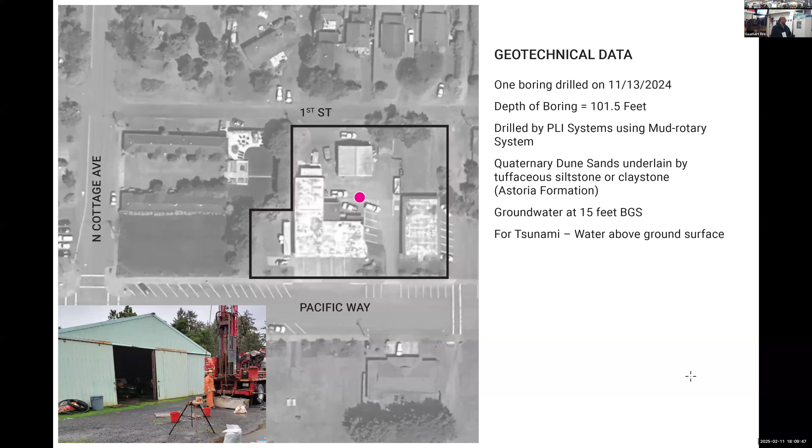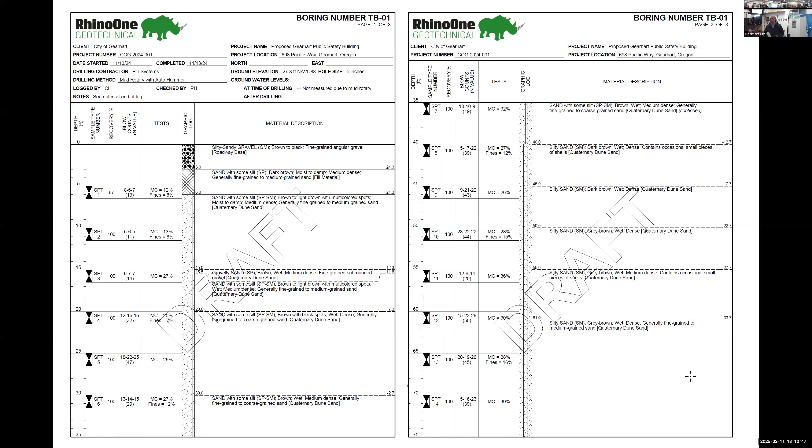One interesting thing about this site is that we have soft deposits and hard deposits, so it's not a uniform soil condition with just soft soils or just hard soils. This basically extends down to about 60 plus-minus feet, and then we get into some better material. Next one.

So our task here was, this particular structure would be designed with the Oregon Structural Specialty Code 2022. It might be the next version by the time we get through the design process, so the code might change. The ASCE 7-16 or 7-22 are the codes used by the Oregon Structural Specialty Code, and they refer back to that for the seismic design criteria.

I understand that it's a tsunami risk category 4 structure. So we looked at all the recent data on the site, we looked through all the USGS data. Based on that, we figured out that the design earthquake on this site is about a magnitude 9 with a peak ground acceleration of 1.13 G. Anything above 0.5 G is a pretty high acceleration for buildings to sustain.

So we did what is called the liquefaction analysis. Basically, what that means is if you've got sand on the beach, if you see the water rises, the sand loses strength. So that's what we see here, that as the water comes up and there is shaking, there will be excess water pressure and the sand will basically lose strength. When it loses strength, we think the settlement would be on the order of 4 inches. It could be as much as 10 inches. Now, the thing about these numbers is they are orders of magnitude. The science isn't there where you can say this will be 2 inches or this will be 20 inches, so these are all order of magnitude numbers that we look at.

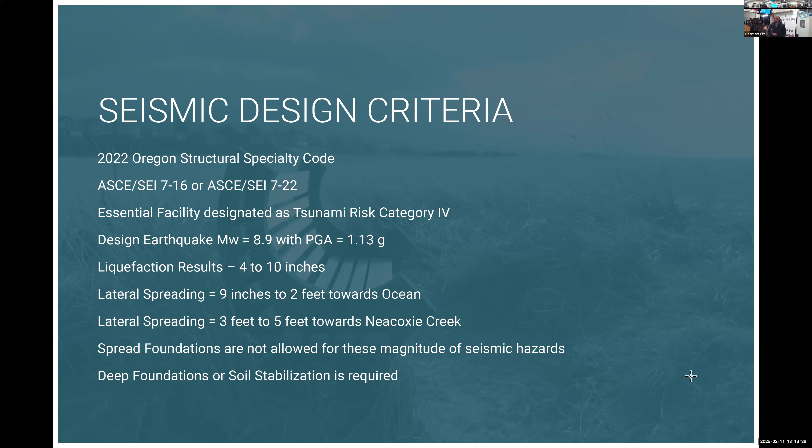So we did look at deep foundations. The concern with deep foundations is for buildings like this, for bridges we'd have no concern, we'd go with a big 10, 12-foot drilled shaft and build a massive structure to support a bridge. But for buildings, the amount of foundation needed makes it cost prohibitive, and it becomes uneconomical to do deep foundations for these magnitudes.

So what we think is a better option here is to do ground stabilization, which is basically we take a big auger, we drill down, and then we inject cement into the ground and mix the soil in situ. So basically we're mixing the soil and making it a better product as we bring the auger back up. It is more economical than a deep foundation, but it's not a very cheap system either.

So this is just a typical layout, based on the work that we did in Manzanita for their city hall. We built a similar system out there. The soil conditions there are not as bad as over here, because here we plan to go down to about 60, 65 feet, whereas over there we were about 45 feet. And the area here is probably a lot larger than what we did in Manzanita.

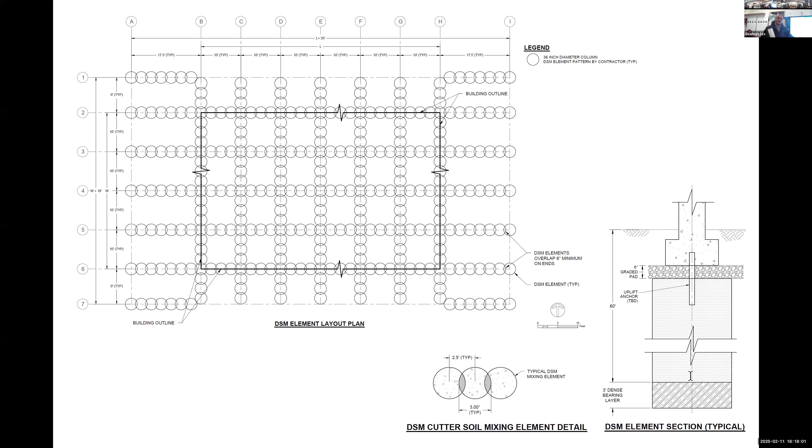So just to be clear, whether there's a high chance or low chance, it doesn't matter because the code says that if there's any chance, you have to design to this standard. That's the standard we have to hold it to. Is that per state of Oregon, the United States government, the county, or who? So there's the International Building Code, which is used in all jurisdictions in the US. And then Oregon has their own code, the Oregon Structural Specialty Code, which refers back to the IBC, and that refers back to the ASCE, the American Society of Civil Engineers. So the governing code is the Oregon Structural Specialty Code, but it refers back to the IBC.

Question, Rajiv - you said deep foundation would be less economical compared to the soil mixing or soil amendments we could do. Would deep foundations include things like rammed aggregate piers? No, we can't build rammed aggregate piers deep enough, plus there's another concern here.

Now the second scenario is when the tsunami comes - you've got material on top basically swirling around, so you don't really have any support there. Basically you have the building, the deep foundation, the slab, and all this soil has now turned into liquid. That's the second condition you'd be designing for. And for building structures, in my experience, it has never turned economical to use deep foundations under these conditions.

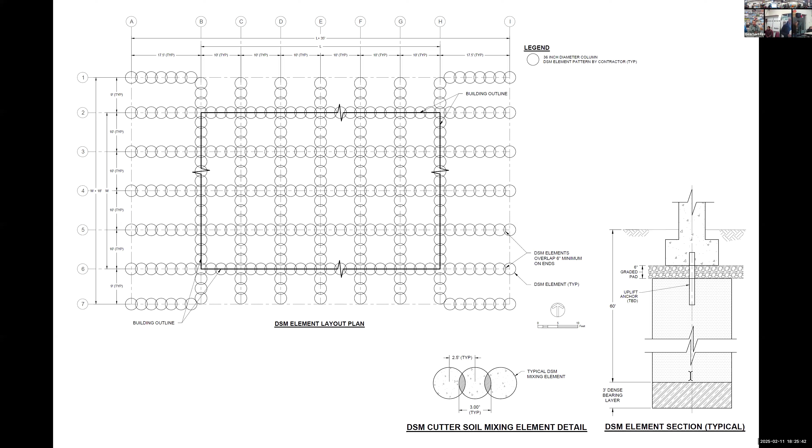I think, Phil, if you want to talk about the site. Now that we know we have great soils, I wanted to do a little prep for the first activity where we start looking at design options. I wanted to remind people of some parameters we understood from the last community session — the setback lines. We looked at the Pacific Power and Light site and identified the setback lines, but we also identified an easement, which reduces the amount of usable square footage on that site.

Also, the ridge path is a space we can't develop, so we can't really unite the two together. We have some light dashed lines showing an offset of about 10 feet from the existing buildings, which we're trying to make sure we don't impede with this new development — either for fire code setbacks from the existing city hall, or for construction space for the building to be built before the fire station is demolished.

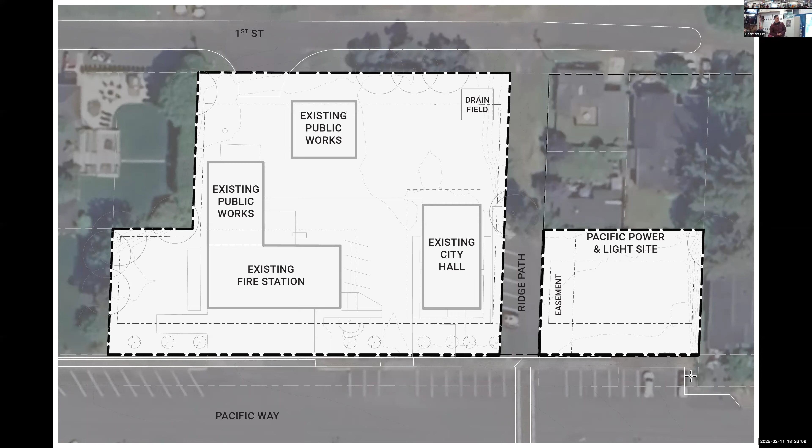I'll give a quick summary of the community process. We had a productive initial work session in December where we listened to the community's goals and priorities for the project. Then in January we presented the draft building program and got feedback and comments on it, and we also had the structural engineer talk about the challenges with the existing structure and how we're thinking about the structure for the new building.

Then there was a fun workshop where we had blocks and got to move them around on the site, talking about development options — the different scenarios and phasing options for development. And then we did the ranking of the priorities.

So everything we heard from the first community meeting, we then got a chance to prioritize and listen to those. And then there was an exercise where we got to rank those. So Phil has a summary of those rankings today.

We had 52 participants in the first meeting, and then 79 people participated, both in person and online. So a lot of good feedback so far on the process.

What Phil's gonna do, as I mentioned in the agenda, is run through the development options. We're gonna basically break out into small groups, talk about the options, have a summary, and then a chance for everyone to give feedback and vote on the options today. That will inform our process, because our goal is to go from the 5 options Phil's gonna walk us through today, down to 2.

That we're gonna take to city council, I think it's March 5th, right, Shannon? So the idea is that the community is gonna recommend the top 2. And then those top 2 are gonna get approved by council and move forward into design development, where we're going to work through floor plans, site plans, exterior and interior renderings of those 2 options, and do a detailed cost estimate. And then that will come back for review and community recommendation in May. So that's our current timeline.

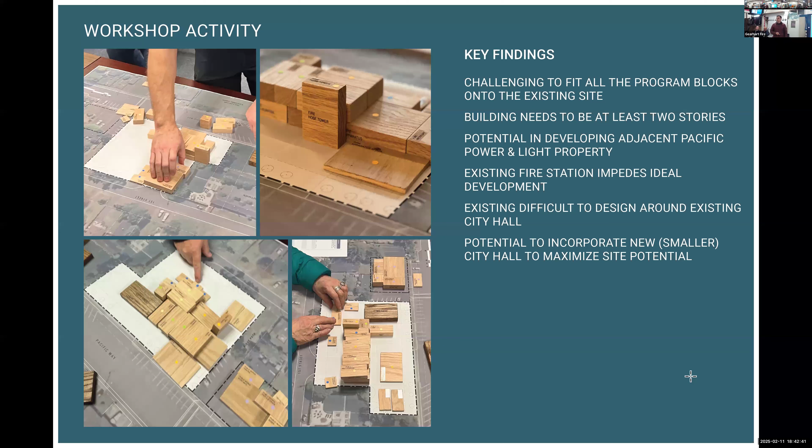And then lastly, there was some potential in incorporating the city hall functions in, which would be a smaller footprint than the current city hall into the development. So we took all those findings and developed all of them. All the ideas we're presenting are essentially generated in community meeting number 2, and we just merged some similar ones. So before jumping into that, were there any questions about making sure we captured everything?

All right, so this is going to be a series of slides walking you through 5 scenarios, broken down step by step. It's going to be a lot of information. We'll revisit the options after we talk about the priorities. But I want to go through each scenario slowly, and if there are questions, feel free to raise your hand, because the main goal is to make sure there's clarity—that everyone leaves this portion with clarity so we can make informed decisions later on.

I have a question—do you know the square footage the Seaside Fire Department in City Hall uses? I do not. Is anybody familiar with that? That's almost a whole city block. City Hall fire station—are you saying it takes up a whole city block? Pretty much, yeah, I think they have 8 fire truck bays.

Here we're sitting at 4 bays—they have pull-throughs so it's double, so that's 8 fire truck bays where we have 4. They put living quarters on top for their volunteers and interns, doubling their living quarters, down there. I can get you an estimate of square footage based on that. And what did they pay for their recent structural additions to the fire station? Over 3 million just to remodel that.

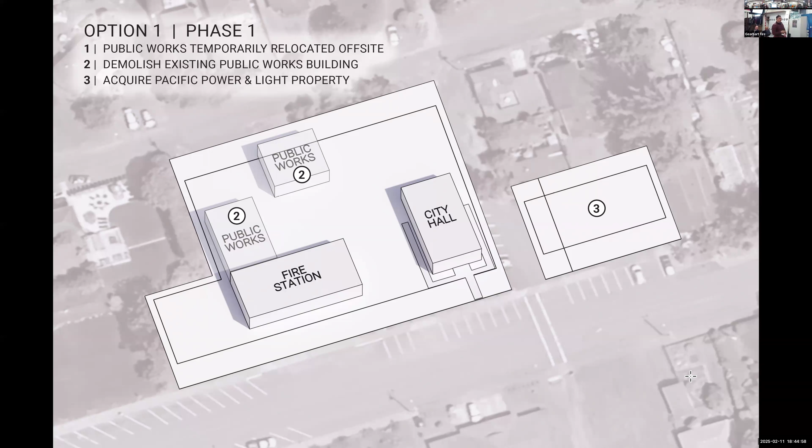All right, okay, so option 1—we're going to break it down by steps. Public Works would be temporarily relocated off-site, and then we would demolish the 2 Public Works buildings. Then it would be in the process of acquiring the Pacific Power and Light property. Once that's done, we would build a singular building that incorporates public safety, PD, fire department, and Public Works as well. We would still have the existing fire station serving as that apparatus protection.

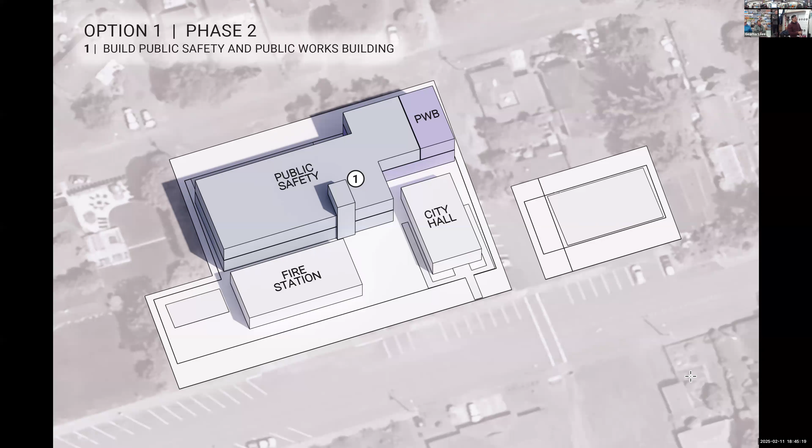And then we would demolish the existing fire station and build that apparatus apron. Over on the right side, in the Pacific Power and Light site, that would be the location for parking stalls and Public Works storage. This scenario doesn't have a lot of available real estate beyond what's shown on the existing site, which is why it really needs the Pacific Power site for vehicles or some of that Public Works storage.

Okay, on all of these, have you looked at your septic capacity? Has that been analyzed? It's been analyzed to the point that we understand the footprint that would be required. In this scenario, that's something that's kind of complicated—here in the southwest corner is where we'd be locating a new drain field, replacing the existing drain field. So there'd definitely be some complications with that.

In this scenario, it looks like the Public Works building is off in the corner, but if I remember from those diagrams, there was sort of the apparatus—there's like the fire. Right, so what you're seeing here is a 2-story space. It's labeled more diagrammatically because it's concealed with space above it, but the apparatus would open up onto First Street on the north side, versus over on Pacific Way. And by 2-story, you mean the height of 2-story, but it's really just a loft for storage—it wouldn't be an occupied second story. Makes sense.

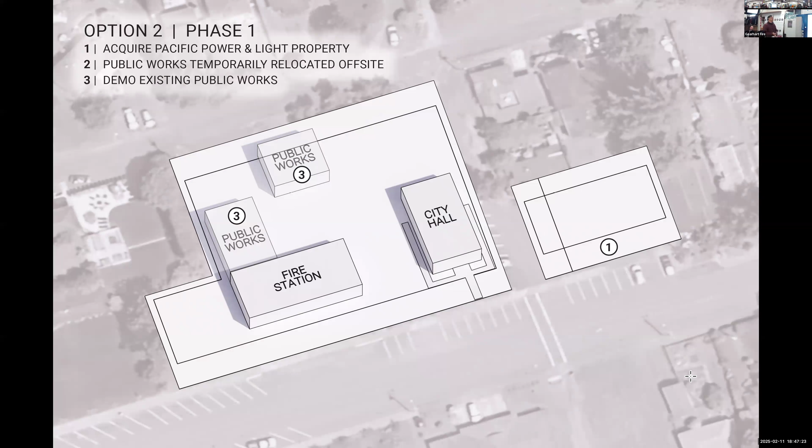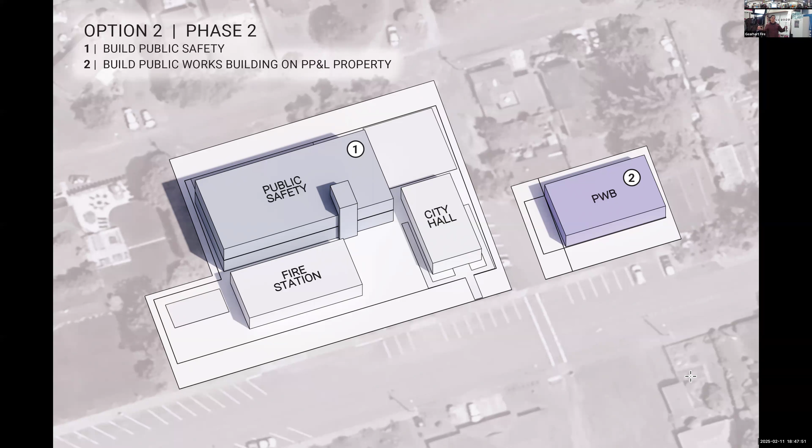All right, so on to option 2. In this scenario, we'd be acquiring the adjacent site, temporarily relocating Public Works, and then demoing that, and building a 2-building option. The public safety building would be separate, but it gives more space over into the northeast corner for a lot of that uglier storage-type space that Public Works would have. The Public Works building would essentially take the entire buildable footprint. And then we would demolish the existing fire station and build the apparatus apron.

So you can see there's now more developable yard in the northeast corner. It would still have access to the fire apparatus bays on Pacific Way, but now Public Works would also have apparatus bay access off Pacific Way.

To a savings, would the Public Works building need pilings underneath it? I think we would not have to build to a essential facility standard. Right, so we'd have to look at the actual foundations. They probably would not need as deep of footings or piling, possibly, so there's a savings there.

Jack, have you had conversations about doing a quick fundraising effort for the $200,000, so it's not an issue about the land for Public Works for the city?

Yeah, I know you've been wonderful.

We have, and actually a couple of the councilors, including Paulina, have been thinking a lot about that, and talking to some of the people out there, so we'll definitely be on top of it once we have a good plan.

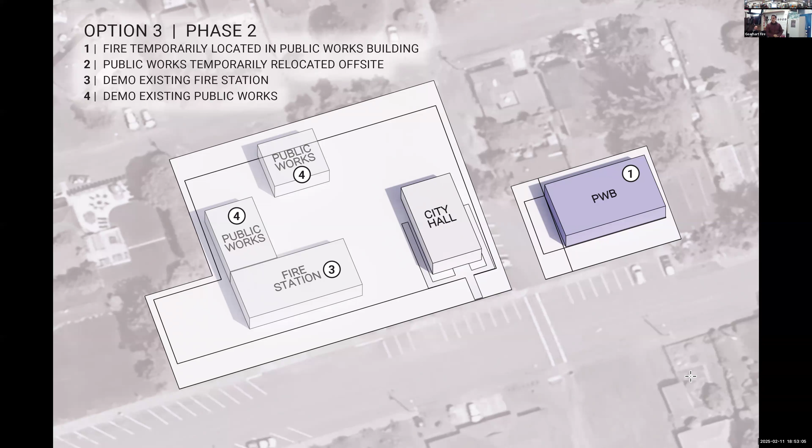All right, so option 3 would be acquiring the Pacific Power and Light site. The first move would be to build the Public Works building on that site, then temporarily house the fire apparatus enclosed and protected. That would give the opportunity to demolish the fire station and the old Public Works building, and develop that site more freely. This is just one scenario for locating fire apparatus where it really needs to be, along with all the site amenities.

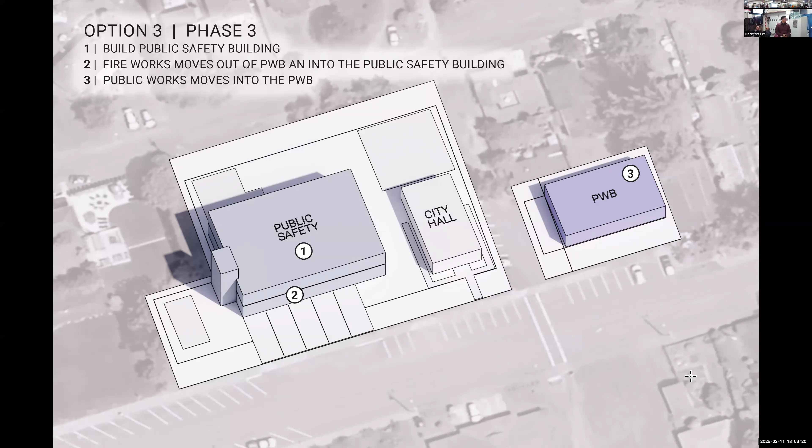And so you can see there's a lot more essentially usable space around it, being able to pull that apparatus bay closer to Pacific Way.

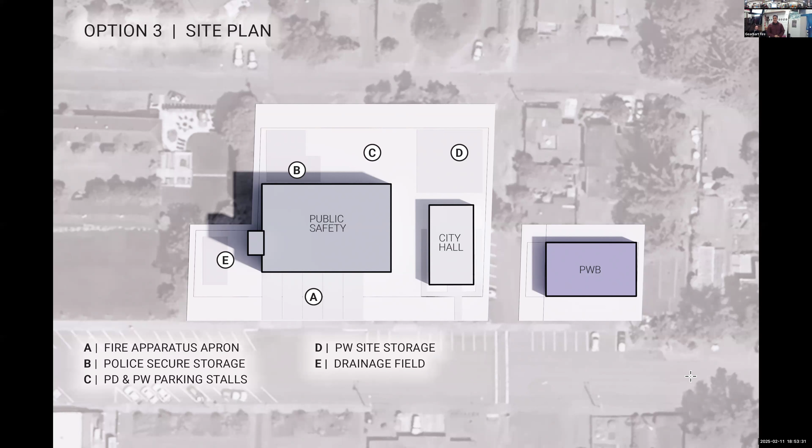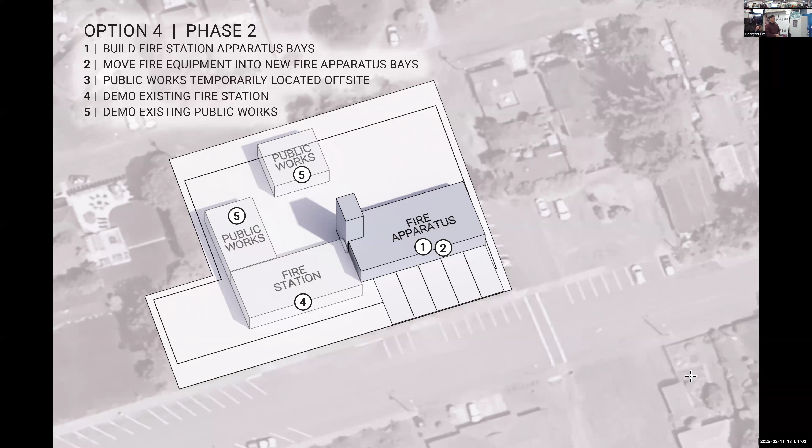So option 4, the next two are going to be going off of that last finding of what potential you had if you took City Hall out initially. So we'd be relocating staff, demolishing City Hall, and in this scenario building a new fire apparatus bay, relocating public works off-site, and demolishing the 3 buildings for public safety and public works, with a smaller footprint for City Hall, about 1,500 square feet.

Again, this is just a scenario, not a developed solution, but in this scenario the fire apparatus bay would have to be on the eastern side of the site. This does not require the Lincoln Power Light property for it to work and get all the outdoor amenities located on site.

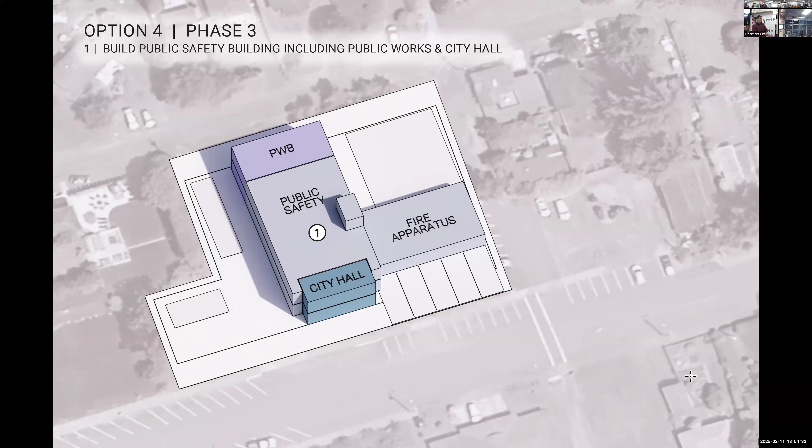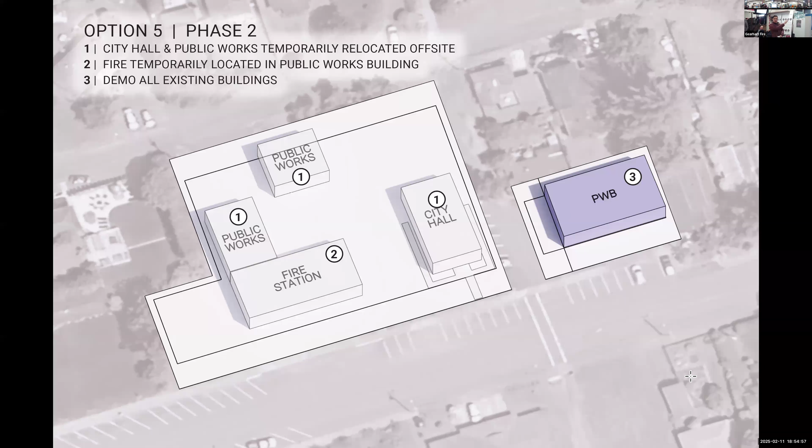So then in this scenario, similarly, we'd be building public works as phase 1. Once you put fire apparatus in public works temporarily, you demolish the entire site, and you have absolute freedom to come up with the most ideal configuration once that's all done. Then you bring the fire apparatus building and public works back in.

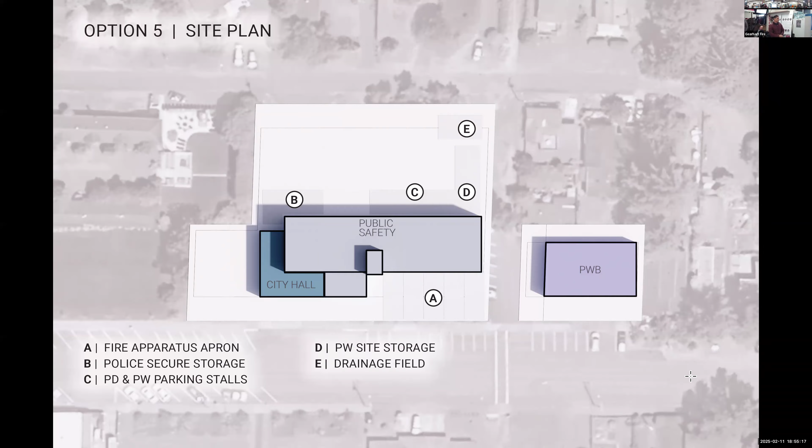And I think that summarizes the 5 options that we are considering. Before we get to the next phase, I want to walk you through the priorities next, reiterate the architectural value of those priorities overlaid onto these options, and then revisit a summary of each of the 5 options. So we'll have another chance to engage and ask questions about the differences between the options.

But before I get to the priorities, is there anything anybody wants to ask? Do you have an approximate cost on each of these options? I know it's a rough cost, but do you have anything that would tell us, you know, that one's gonna cost way more than this one? No, we can talk about relative costs from one to another, but not specific costs.

That'll be covered in the summary slide, with the cost considerations and, like Ian said, the relative costs between the options for all 5 options.

Just before we move on, for those of you who participated in the workshop last week, do these feel like the options you looked at and talked about? Different configurations? Yeah. And I think we have to remember too that those of us who participated in number 2 have been talking to people about them. So I feel like, while we're not the whole community, we're reaching out to the community. And remember, everybody is invited to be here.

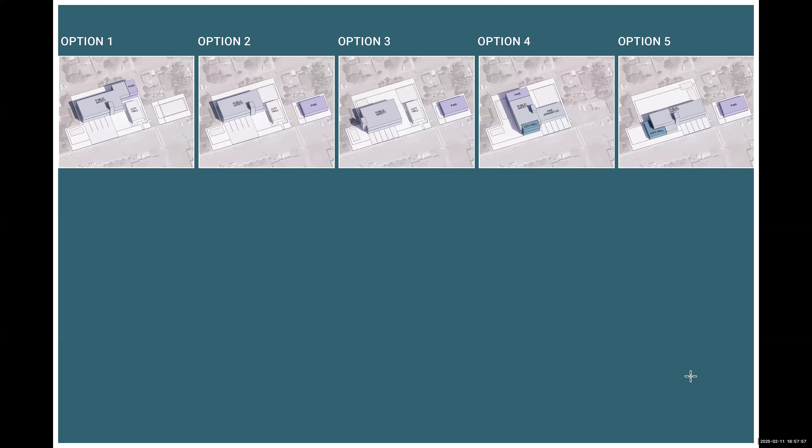So in looking at the different options, it looks like some of the access for the services are from Pacific and some are on First Street. Is there any issue with that in terms of the public works on option 4? Would they come and go from First Street rather than Pacific Way? Is that correct? Yeah, that's correct. So Public Works being on the north side of the site would have access off First Street.

So Public Works didn't have any challenges with vehicles coming in and out of that, but we did, when we looked at it being used as interim storage for the fire apparatuses, it would not work because of the apron and the turning radiuses for the apparatuses themselves. So that's why you don't see that as an option, something we explored, but we realized operationally that was not gonna work. Thank you.

Is it problematic at all for the residents on First Street, that Public Works coming and going from there? They already are.

There potentially is an issue with the only in-and-out for Public Works going back in that direction - there would be more traffic. They're using it currently, maybe not to that degree, but it would increase. There could be a benefit because the grade is lower there too. The grade is a problem back there because of the hill, and where the fire trucks' rear bumpers don't quite clear. For Public Works we could drop the whole thing down, but there's some flooding concern, and we also want to keep elevation for our Public Works folks since that's where repair equipment comes in to help us get back into shape after we've been knocked out of shape.

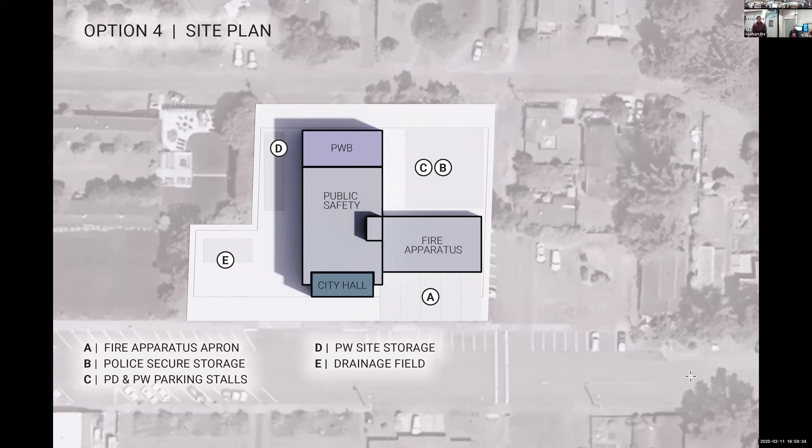There was a question about the water plant. I was wondering about the second story of the plant - is there space up there, is there equipment in there? It appears to be a second story. Yeah, it appears that way, but it's not - it's a high ceiling to fit the equipment that's running for us, and so we can get little cranes in there to lift the equipment out. There's nothing up there, that window is a window to nowhere. So there's no way for us to utilize that for the city? No, we're using it now for some equipment.

What about when Seaside did their bump-up for their residences, expanded residence? They took the top of that building and bumped it out on the side. I'm sure there's a possibility to put a third floor onto that building. Essentially there's almost two floors in there now, but I'm not sure it's built with that in mind. It's a very robust building though, that's for sure.

I guess my first thought would be parking being an issue down there, depending on who went there. If the police department sent vehicles down there, they'd still have to have one car, and remember they have to bring in suspects in a secure environment. Also, when you have a police station, you need some way for the public to interact with police, so we'd have to divide that up - we could require another staff member to interface with the public, at least during some hours, rather than using existing staff to serve both functions.

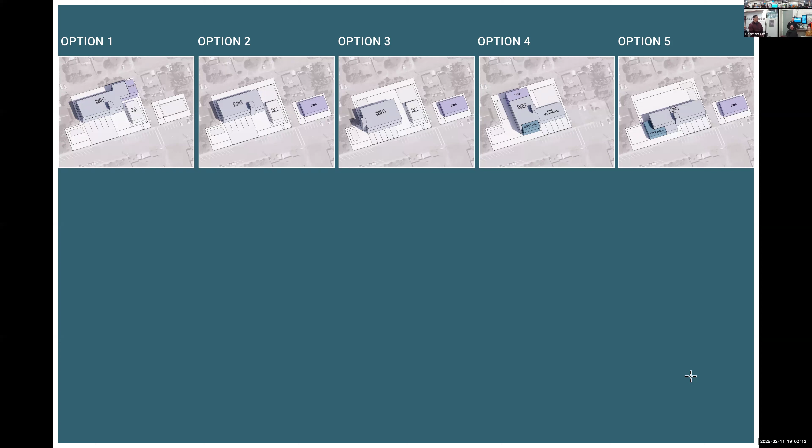So like we mentioned earlier, this is a buildup of our community session one, where we did the feedback and the dot exercise around the priorities. The findings from the survey were mostly in alignment with how we initially ranked it - functional and practical essentially slotted first and second, and safe/secure and resilience also flipped, but the rest of the priorities remained the same.

We took your priorities and have a slide for each describing what it is. For functional operations, we want to make sure this building supports the specific needs of the PD and fire department, looking at factors like accommodating all program spaces, maintaining ideal adjacencies between departments, and providing shared spaces to collaborate. Some factors, like shared spaces, are essentially non-differentiators between the different options - we'll filter through those, but once we choose the two options we'll apply these values to make sure they're still achieved.

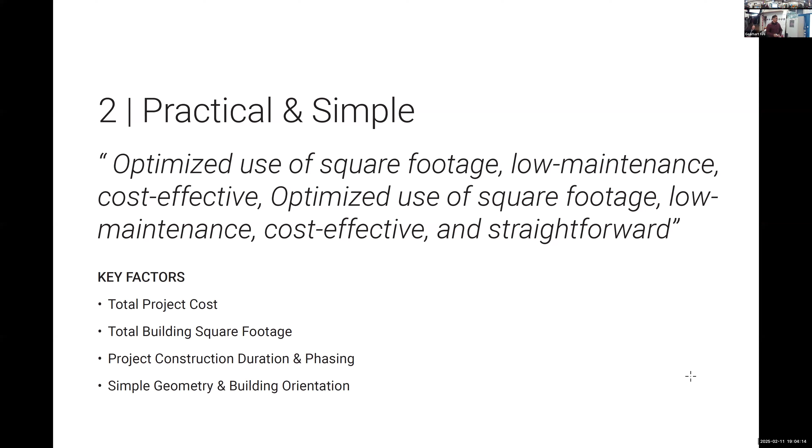But for this phase, it's really just looking at the site, location, and development options. Second, being practical and simple - thinking about optimizing square footage, making sure the building's low maintenance and cost effective. Total project cost is the most important thing, but things that feed into that are total square footage, construction duration and phasing. We talked about foundations, the footprint of the building itself, simple geometry and building orientation, maybe maximizing passive ways to heat and cool the building to save money.

Safety and security - providing a workspace that prioritizes security for everyone who works there and any visitors. This means controlled access to sensitive areas, safe ingress and egress for emergency vehicles, and just a safe environment overall.

Resilience, so we're making sure that the operations of the facility are still functioning after a seismic event or tsunami event, and as mentioned before, the evacuation tower is also something that this building could provide. So community resilience.

The departments being able to be responsive and available, so access to arterial roads. In all scenarios, the apparatuses are going to be directly connected to Pacific Way, so that's not a differentiator. Response time is not a differentiator, and the protection criteria is essentially the same.

But we're gonna want to make sure that as we develop it, that we're thinking about those things, like the distance from the apparatus bay to Pacific Way, there could be a difference between them.

A building that's dependable and solid, so durable materials, the ability of the site to allow for future flexibility or expansion is another important factor. The building being transparent and open, so strengthening trust between the departments and the community, making sure the building's universally accessible, feels warm and welcoming, and the entry is at least visible to the public.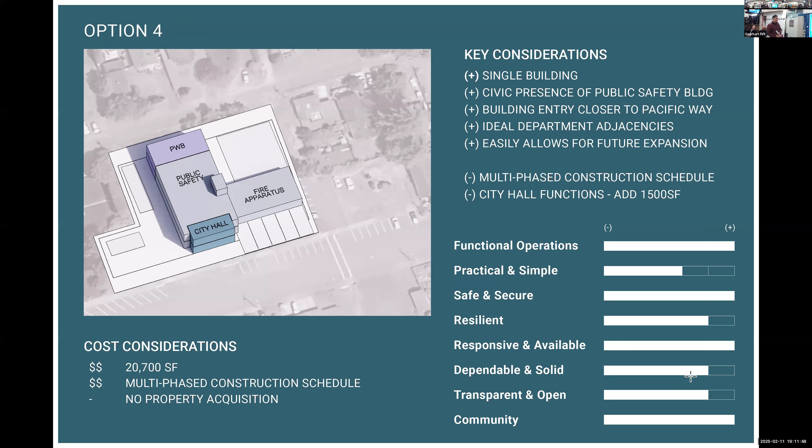Option 4, single building, the civic presence of the public safety building. We could be a lot more thoughtful about that entry. It's closer to Pacific Way. Because all the programs are on one site, we can achieve better adjacencies. It does allow for future expansion with available space on both the east and west of the building. This does have that multi-phased construction schedule, so there's an extension there, and this would be adding a total of 1,500 square feet with that City Hall function being incorporated. So the square footage is higher, at 20,700. And you have that same cost increase with the multi-phase construction schedule.

And then finally, option 5: the fire department and police department adjacencies are achieved. Public works is still offsite, so that's maybe not great. This allows for future expansion. And then we have the drawbacks of the schedule, square footage, and additional square footage with City Hall. Public works in this scenario is off of Pacific Way, which we found is not ideal as well. And then you get the cost considerations of the higher square footage at 21,200 square feet, multi-phase construction schedule, and this does require property acquisition.

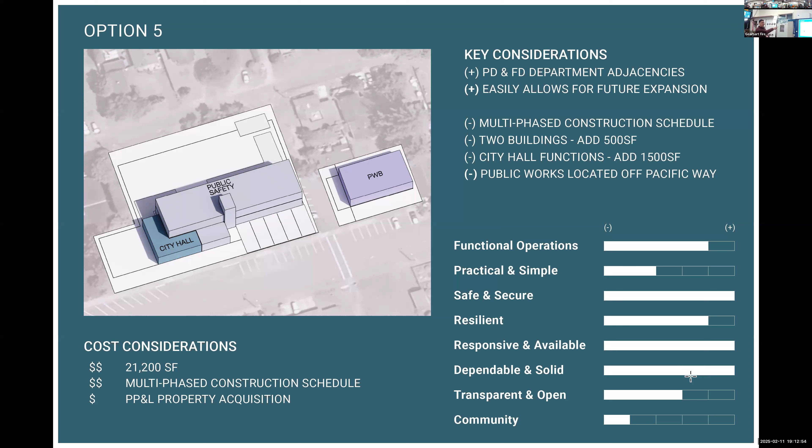Which would be here, and this is where we want to jump into the exercise now. As John was mentioning, the idea is to have a conversation at each of these tables. There doesn't need to be a consensus at the table—we don't want everyone to just vote—but we wanted that dialogue to talk about those values. Because these are our interpretations of what's important, talking with the PD, the fire department, and the city. But you guys, as community members, also have your own relative priorities. So that's where we want you guys to take a look at the options, discuss amongst yourselves, and then individually rank your favorites.

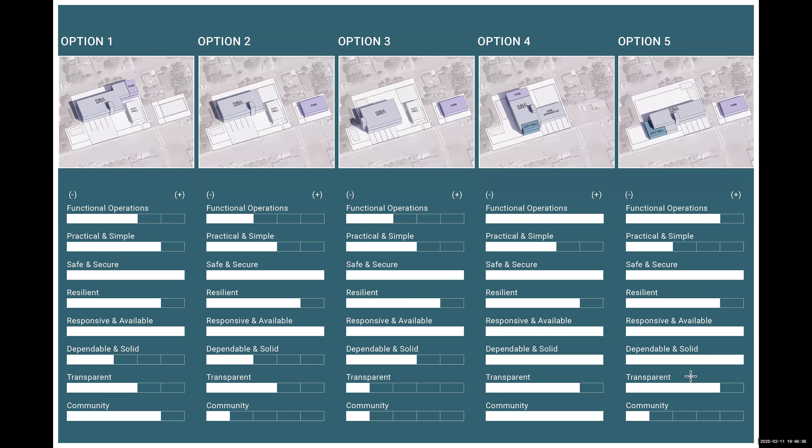Okay. So for people in the room, they can drop their forms off up front, but before that, I'll let Ian introduce the second activity because we want to get the character development right for you first.

All right, so we have an exercise to do today before you leave, please. What you'll see over here on the right are basically a series of images. When you're designing a building for a community, you don't really think about a style of some kind. We're not talking about a Cape Cod or a Craftsman or something along those lines. What we are trying to do is find something that fits what you feel Gearhart is to you and your community. The other piece of what we're trying to do is to remove personal preference from the design conversation. If I was to poll people around the room what their favorite color is, I'd get a rainbow. We don't want this building to look like a rainbow, right?

And so what we're asking you to do is, you'll find the images are somewhat abstract. There is some architecture in there, but we're really trying to get at the character and quality that you want represented in this building. So it is a little bit more of an abstract exercise. What we'd like you to do is there'll be a series of Post-it notes. What colors do we have, John? Red and green. Red and green, pink and green.